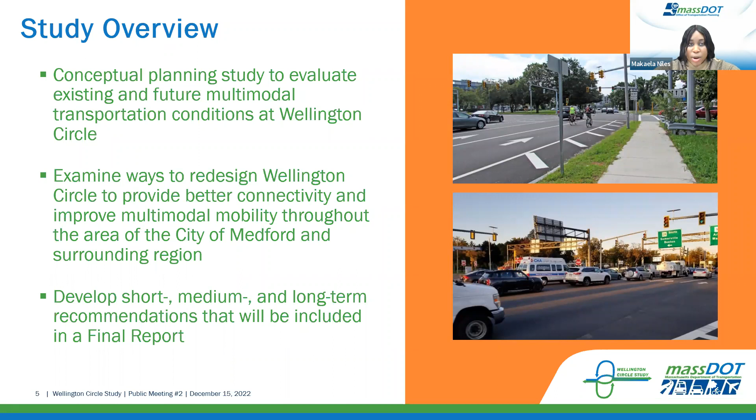And based on the analysis and the feedback received over the course of the study, short, medium, and long-term recommendations will be developed and included in a draft final report that will be released for public comment, then finalized in a final report.

And so with that, I will hand it over to Gary McNaughton of the consultant team to review the issues and opportunities. Gary? Thank you, Makaela. I'm going to run through the issues and opportunities, and also walk through a little bit of an overview of the alternatives and the development process that led us to those alternatives that went through the analysis that we'll spend most of our evening talking about.

With regards to the issues, constraints, and considerations, they're well known. The challenges with the circle: there's a number of deficiencies that make it difficult to travel through the circle and challenging for any mode. Vehicles encounter excessive delays, with multiple lanes turning, creating various conflicts and safety concerns.

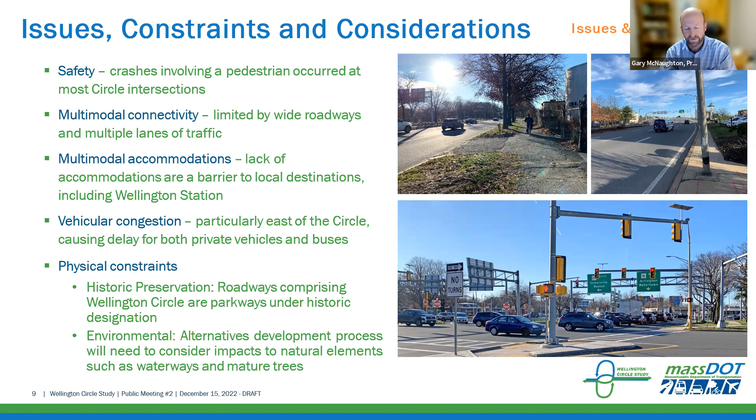As we develop these alternatives, we also have to consider some of the physical constraints. There's historic elements of the corridor, and there's environmental concerns and areas where we want to make sure we're not having negative impacts on those criteria as well.

But the circle does offer us a number of opportunities. There's a very wide right of way in the area that gives us the ability to look at a number of alternatives without impacting abutting private property.

There's changing land uses and abutting open space that gives us opportunities to connect into those properties better, provide opportunities for walking and biking that can better utilize the infrastructure through the circle to take better advantage of those surrounding land uses. All of these together, we think we can make improvements that will reduce congestion, provide healthier, safer transportation options through the circle and for the surrounding area. Those are really some of the goals that you'll hear more about later in the presentation.

The alternatives development process really starts at the very beginning, looking at very basic alternatives and concepts. But it's a lengthy process. We're starting with very simple concepts, focusing on vehicle movements. While that's not one of the primary goals of this study, focusing on vehicles is a starting point because they're the least flexible, the hardest to accommodate and analyze in a number of ways. So we start from that perspective.

We run it through a fatal flaw screening. If something becomes completely unacceptable, we've deleted it at that point and we're no longer advancing it further. But those that did show promise, where we think we can make this one work, we then started to assess them for pedestrians, bicycles, and transit, looking at the ability to add in infrastructure for those modes. In some instances, if we weren't able to accommodate those modes, that became a fatal flaw and those concepts fell out of the mix. Those that did pass and showed promise for all modes were identified as the feasible concepts, and those are the ones subject to detailed analysis against the project goals.

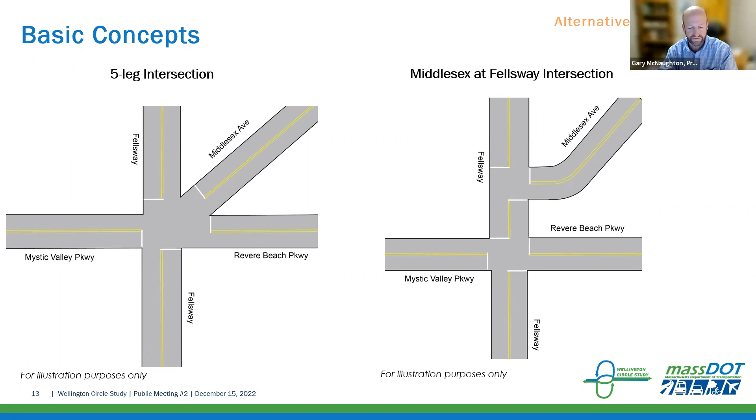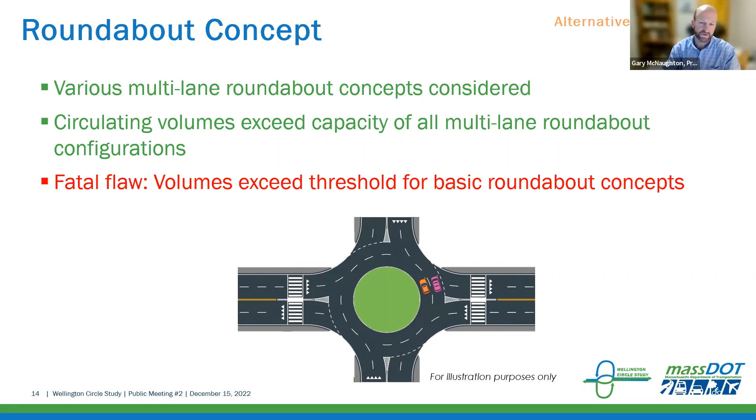From there, we started looking at different intersection configurations and what we could do to make things work for all modes through the circle. We did look at sticking with a circular configuration, looking at roundabouts, whether a singular roundabout or multiple roundabouts, including multi-lane roundabouts. What really happened with any of the circular configurations, because of the travel patterns we see through here, is you end up creating more conflicts than under existing conditions, putting the highest volume moves in conflict with each other. You ended up with a large number of circulating lanes and entering lanes, making it very inhospitable for pedestrians and bicyclists, and honestly not doing a very good job for vehicles either. So we moved away from any of the circular and roundabout concepts.

From there, we started to look at more advanced intersection configurations. Could we look at jug handles, or some different ones you may not be familiar with, like the restricted crossing U-turn, or an RCUT, where you're not allowed to go straight through from the side street. Everybody's turning right, and then you're either going downstream and U-turning or going on to your destination in a different direction.

We looked at continuous flow intersections, where you have intersections on the periphery that allow left turns to cross over through movements, so that when you get to the primary intersection, that traffic can all flow at the same time and you're maximizing capacity. That one showed some promise, but actually had a lot of challenges for pedestrian and bicycle accommodations, and we ultimately moved away from that one as well.

The RCUT had a high volume of U-turning vehicles that made it implausible to implement the RCUT treatment. And the jug handles really just relocated conflicts, but didn't do anything to improve upon or solve any of the traffic flow.

The fourth configuration that we looked at was the quadrant roadway, and that one did show some promise. As you'll hear, the primary traffic flow through here, the heaviest traffic flow, is really from the south to the east, and then the reverse movement. So the quadrant roadway allowed us to provide a more direct connection for those movements that did show some promise, and you'll see that carried forward into the alternatives.

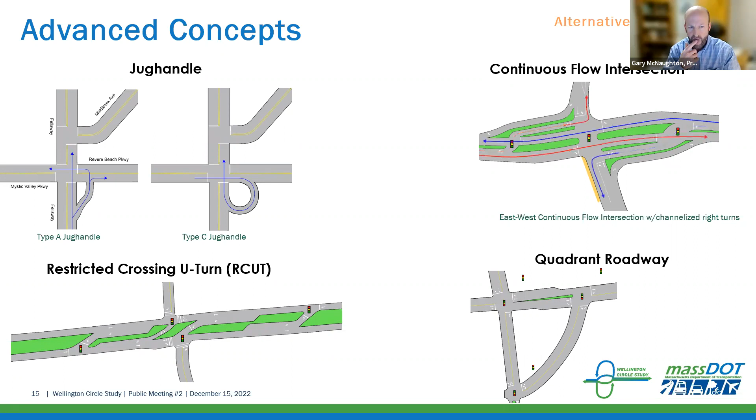So after we got through the initial concepts and started to work out some very basic ideas of what may be feasible for the intersection, we worked with the regional planning agency and their technical division, CTPS, the Central Transportation Planning staff, and they work with the regional travel demand model. So they're giving us the estimates of future traffic volumes, both with and without the project. And they do continue to show growth in traffic volumes, but we didn't necessarily let that drive our design.

A lot of our concept development work was done with existing volumes, and then we were testing things with those future volumes. And we'll talk about some of the traffic volume growth and some of the limitations for accommodating that, and things that may need to be thought of a little bit differently as some of that development occurs and potential traffic volume growth is underway.

We did use a lot of that time and a lot of that analysis to refine the cross sections. We refined the analysis to show access to abutting properties. We tweaked lane designations. We added accommodations for sidewalks and bike lanes, and again, made sure that we were able to accommodate all of the abutting properties and the driveway access that we needed.

You'll also see an alternative that was transit enhanced, looking to improve bus operations through the area that we carried forward. And then you'll see on some of the alternatives, we're missing one of the key crossing locations just due to the nature of the traffic flow and what we're able to make successful in the alternatives. So we looked at the potential for a pedestrian bridge in those crossing locations.

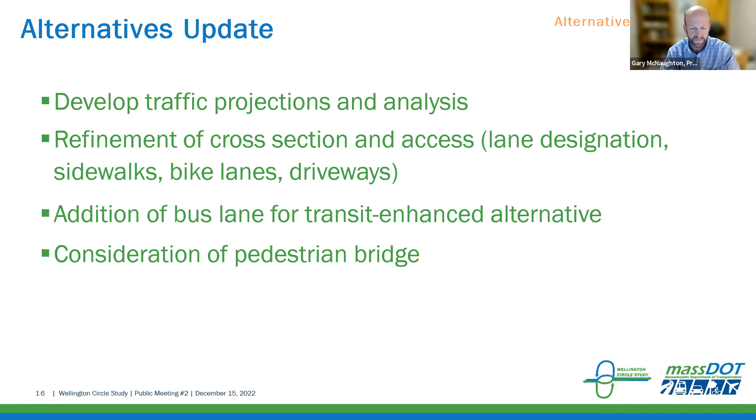So now I'll start presenting the various elements of the alternatives that were advanced into the analysis stage. And then once I'm done walking through the alternatives, we'll start talking about the detailed analysis. All of these are very preliminary designs, so there's a long way to go in design development. These are based on aerial imagery and GIS level mapping.

So any of the alternatives that move forward into more detailed design, there'll be real ground survey, there'll be much more detailed assessment of right-of-way, more vertical design, investigation, utilities, et cetera. So I just wanted to put that caveat out there that there is a long way to go, and these are very conceptual at this point.

So we started looking at some of the short and medium term alternatives. What could we do to improve upon the existing intersection configuration without completely changing everything? And this, what you see on the screen, is what we're referring to as option A, which was a compilation of several a la carte type treatments that we had developed through the process.

We heard feedback that the free right turns, those separated right turns that you see, there's still one in the northbound in this image, but the eastbound has that swooping right turn that's able to be navigated at a fairly high speed for vehicles in front of the state police facility. Similarly, you have one in the southbound direction, and you'll notice those are all removed except that northbound right turn, which is one of the heaviest movements in the corridor and really does need to remain separated.

As I noted, we saw a lot of delays with the right turn movements by removing those separated right turns. So we developed Option B, which simply restores the eastbound and westbound separated right turns. Although in the eastbound direction, we would tighten it up and make it a little less sweeping — something not quite as high speed and better able to accommodate peds and bikes in a lower speed environment. And we would signalize it as well, so pedestrians and bicyclists would have a protected crossing.

So we are seeing some benefits to pedestrians and bicyclists. We're able to shorten some of those crossing distances, and we're getting some of the same benefits in open space. Again, the cost is really essentially the same between these two alternatives when you work them both out. So these show some promise without major construction, but they don't accomplish a lot of the project goals.

The westbound approach coming in is unchanged. Much of the inner part of the circle is unchanged, except for the elimination of that eastbound to northbound left turn. So it offers some benefits, but doesn't get as far as we wanted to.

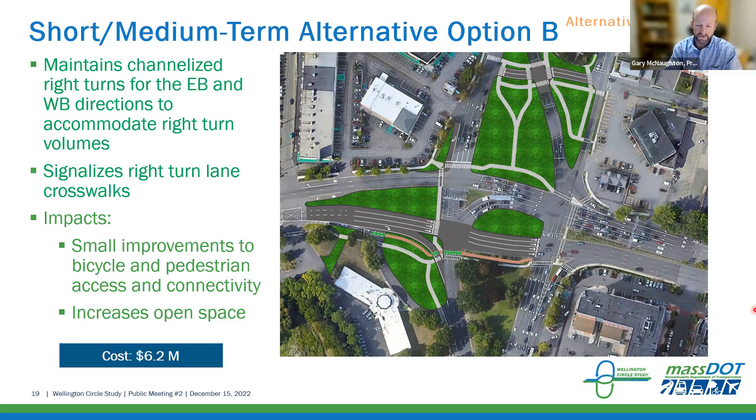So we then moved on to the long-term alternatives. We had a series of both at-grade and grade-separated alternatives that we looked at. But when you start with the existing circle, one thing to note is the number of lanes — keep that in mind as we go through this. You have 6 and 7 lanes on each approach, with 2 and sometimes 3 turning lanes, which we've heard a lot of feedback about, how challenging those are not only for pedestrians and bicyclists but even for vehicles. We were really tasked with trying to improve those conditions, and you'll see a lot of the alternatives use fewer lanes than what exists in the circle today.

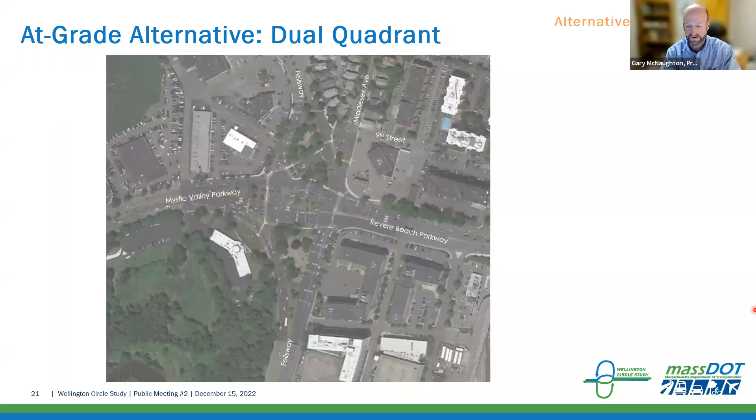So if you go to the next slide, the first at-grade alternative we advanced was the square concept, so named due to the configuration of the open space on the north side of the parkway. You'll notice some key elements of this concept are the quadrant roadway I talked about earlier in the basic concept — from that south section of the Fellsway over to Revere Beach Parkway to the east, we have a new connector roadway, or quadrant roadway. We have elements of that to the north connecting up to Middlesex Avenue as well.

But the primary north-south configuration for this alternative is the Fellsway straight through. If you're on the Fellsway and continuing, it's a straight through movement — there's no need to turn off of that. This does provide a direct connection between Revere Beach Parkway and the Fellsway to the south, which is some of the heaviest traffic flow we see. You'll see a number of locations with fewer lanes than what you see out there today.

And with medians that separate those pedestrian crossings, so you're not crossing seven lanes at a time or more. You're crossing three lanes before you're at least coming to a refuge area along that. We are able to add in pedestrian and bicycle accommodations.

So the light blue aqua color is sidewalks, and the bicycle connections and sidewalk level facilities. The tan areas are the sidewalk or walking paths that we're able to add throughout. You'll notice those throughout the project area.

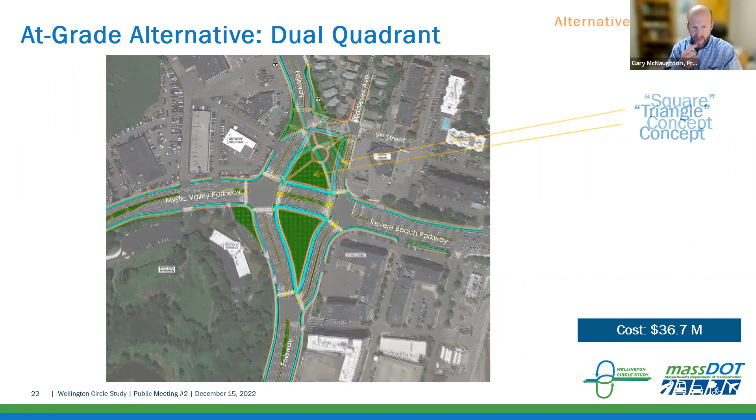That's where we started looking at the grade separated alternative that I'll touch upon. So if you go to the next slide, this is really the other at-grade alternative, called the triangle, again based on the configuration to the north of the parkway itself.

This one really shifts the Fellsway so that its primary connection is onto Revere Beach Parkway. If you're coming down the Fellsway, you're going straight through onto Revere Beach Parkway. If you want to continue southbound on Fellsway, you're going to turn right to then go straight through. This one does a good job of connecting those heavy movements, the heavy flow.

It does a nice job of doing the same things with narrower crossings, medians to provide a break for pedestrians, and additional space for pedestrians and bicyclists throughout the roadway network to fill in some of the gaps we see within the bicycle network and pedestrian connectivity through the area.

The one element common to both, which I didn't mention on the square concept, is the eastbound left turn is eliminated within the intersection itself. Those movements would instead be accommodated at Commercial Street. If you're accessing the retail center, there's still the ability to make that movement, but the left turn at the intersection itself would no longer be there.

So if you go to the next slide, this is the transit enhanced alternative. We're also tasked with trying to make improvements to transit. While the at-grade alternatives would allow transit to exist and move through the intersection areas, we really wanted something we could build upon to make significant improvements for transit.

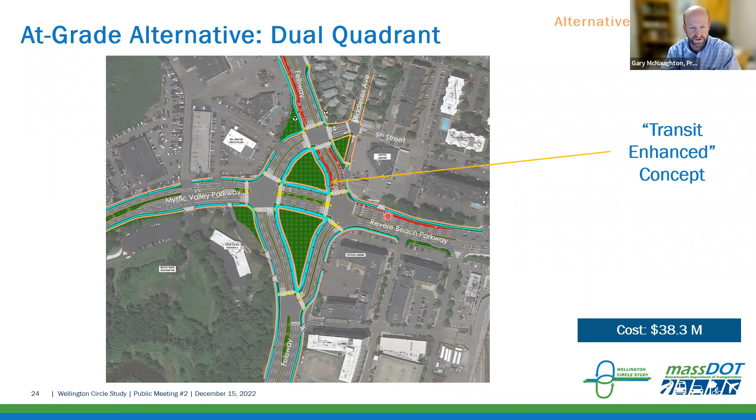And again, missing that crosswalk on the east side of the intersection with Revere Beach Parkway. So if you go to the next slide — there's a lot of desire to try to keep a crossing there. It's not feasible to do it at grade, so can we do it in a grade separated fashion?

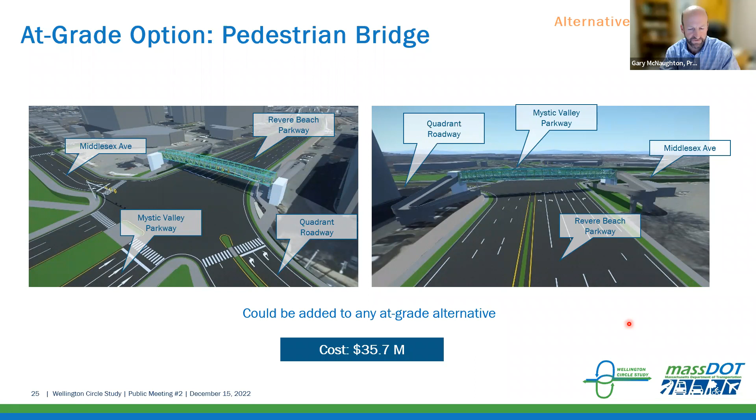The other alternative we looked at was a grade separated intersection that carries the amount of volume that this one does. Grade separation is a natural concept to consider. Some of the uniqueness here is that the primary movement, the heaviest movement from south to east, doesn't necessarily lend itself as well to grade separation. Doing curved structures presents some unique challenges, and as we started to look through it, it really didn't end up solving a lot of the problems.

It leaves a lot of things at grade that presented their own challenges. So as we looked through the different grade separation alternatives, we ended up with grade separating the east-west traffic. It's simpler construction, it accomplishes a lot of the same improvements that we would get from that south and east movement, but gives us a little bit more of a normal roadway network to work with.

We also looked at the underpass. There was a lot of discussion about having a bridge through the area not being desirable, but an underpass might be far less impactful. But as we started looking into the underpass, there's a lot of complications with it. It's much more costly to build an underpass than an overpass. There are a number of utilities through the area, and there's also flooding risk, potential severe flooding during storms, particularly as we look at various climate change projections. Operations and maintenance costs get significantly higher as you have to have pumps and such for drainage considerations with underpasses. So we ended up not carrying the underpass forward into a detailed evaluation.

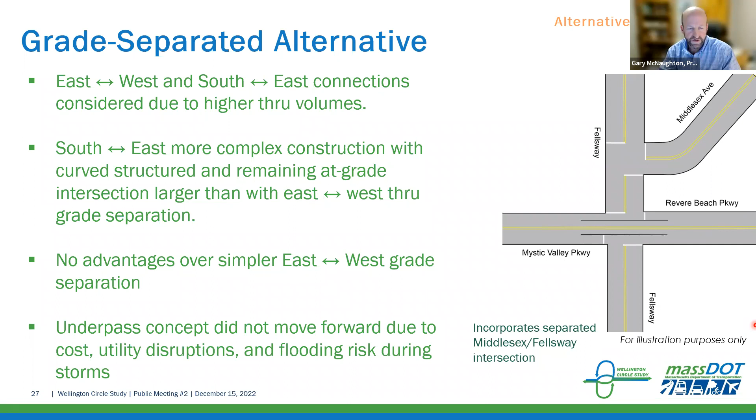So the next slide illustrates the grade separated alternative. You'll notice we still have the quadrant roadway connecting from the south to the east, and Revere Beach Parkway down to Fellsway. You'll notice the bridge structure in the east-west direction going up and over the north-south roadways and those connector roadways. What we end up with on the surface is some narrower roadways, but the roadways are still required to be intertwined around the structure, around some of those supporting piers and walls, so you end up with a little bit of an atypical roadway network on the surface. It's still necessary to make those connections directly between the south and the east.

So you see some curved roadways under there, and again a little bit narrower, fewer lanes on the surface, but a slightly more complicated network and configuration. And you'll see a much higher cost, where the other at-grade alternatives were in the $30 million to $36 million range, this one's 5 to 6 times that cost, quite a bit more expensive.

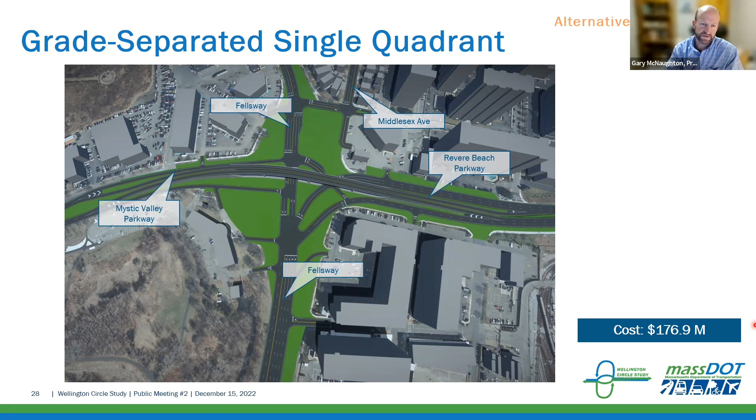The other factor to consider with a grade separated alternative is really the separation and the barrier that it can present. From a visual perspective, this is an illustration from grade level of what that overpass would look like. We've pulled back the retaining wall sections and tried to create as long of a span as possible to keep it as open as possible. But even with those design elements, you still have quite a barrier that would exist and create that underbridge environment that pedestrians and bicyclists would need to travel through.

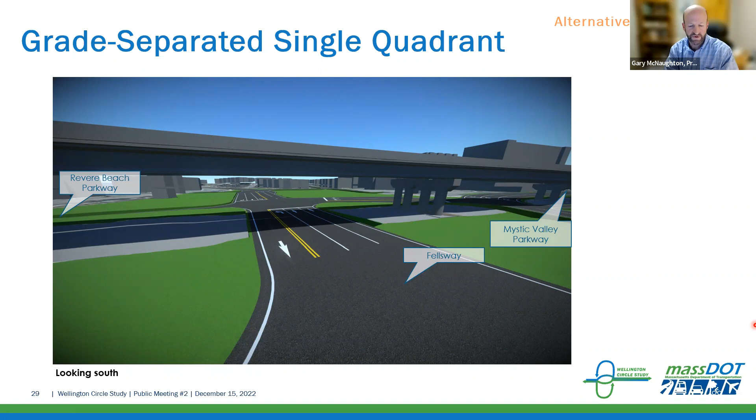So now we'll start talking about the alternatives evaluation, which was applied to those alternatives I just walked through. It's really looking at the study goals, and there were 4 primary goals for the study, informed by a number of evaluation criteria. What we tried to do for this evaluation is keep it fairly simple, not get bogged down into arguments over the nuance of a 1 to 10 scale, is this a 6 or a 7, anything to that level of detail. We just used 3 ratings: does it benefit this criteria, is it neutral, or does it have negative impacts for this particular criteria.

And those are the way that you'll see all of the results presented to you this evening. And with that, I will turn it over to Maureen to start talking about the first criteria that we looked at, which was improving safety.

Thank you, Gary. So throughout the development of the design, safety was definitely forefront in our minds. As we talked about, we reduced some lanes and conflicts, which helps with vehicle crashes. But you can see on this slide a number of elements that would be used to help the other modes of transportation in terms of crashes.

At the onset of the project, we had looked at 3 years of crash data in the Wellington Circle area, and there's a tremendous number of accidents. There were 278 crashes over that 3-year period. Every intersection had pedestrian crashes, which is certainly alarming, and the high frequency of angle and sideswipe crashes between vehicles was also alarming.

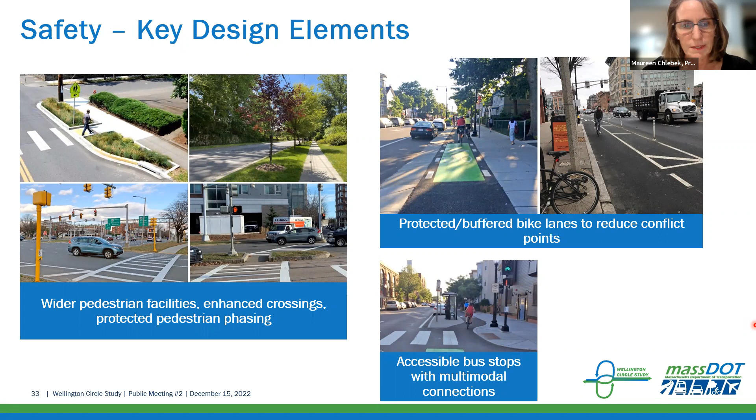So these elements are used in the design. You'll see these features in the design. And again, safety was just our top priority. So on the next slide, we'll summarize how each of the alternatives scored, so to speak, in terms of safety.

So every alternative is expected to reduce crashes in comparison to what's happening out there today. The short-term improvements are expected to marginally improve safety in the area. The build alternatives take it to a higher level with a lot more conflicts removed between each of the modes, the motorists, the pedestrians, the bicyclists. If you look at all the build alternatives, the grade separated alternative results in the fewest conflict points.

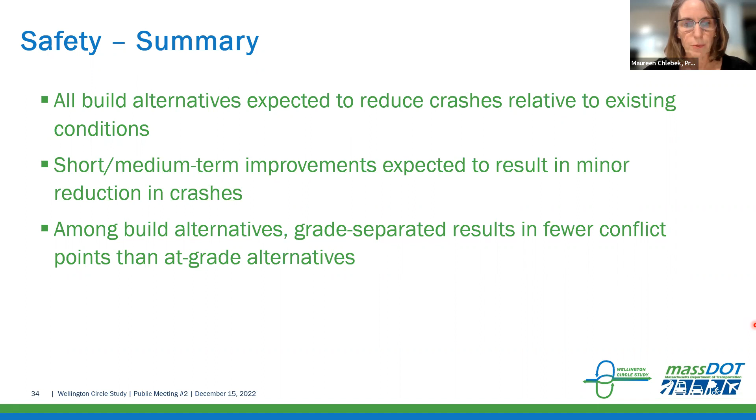Next slide. Now I'd like to walk you through some of the traffic analysis that was done. And again, we're going to talk about each mode of traffic that's out there. So we're kind of spelling our results right out at the beginning. And as you can see here, we evaluated how each mode of transportation works for each of the 4 alternatives.

The short-term, the long-term at grade. The first one would be the square. The second one would be the triangle with transit enhancement. And then the third long-term is the grade separated.

And as Gary had explained, we either said it was better, neutral, or it got worse. What we'd love to see is one row with all green checks, but that doesn't happen in Wellington. And what this says to us is really it's a balancing act. We can improve some aspects, but it's going to hurt other modes.

So throughout, you can see the short-term improvements offer a little bit of improvement to the pedestrians. As we get into the long-term improvements, again, the walking and biking improves with the at-grade alternatives. However, it's at the expense of some of the driver operations. And then as we get into the long-term grade-separated alternative, we perhaps improve vehicle operations, but we don't help the transit and walking. So keep this in mind as we go through the analysis.

I'm going to speak to the vehicle operations, and then Emil will speak to the walking and pedestrian operations.

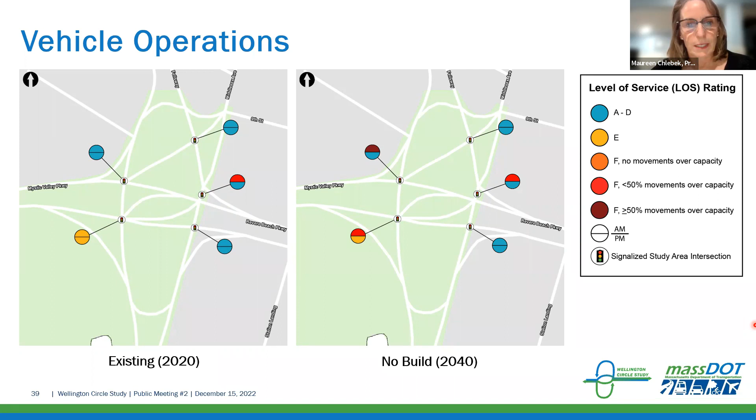Because it's a large infrastructure project, we typically project out 20 years. As Gary said, we have accounted for some growth out there. We haven't designed for the growth, but the evaluations on all the build alternatives will be based on the 2040 conditions. So what you can see here is if we compare what's out there today, if we do nothing to the roadway system, you can see what we would expect to happen by 2040. Some of the levels get worse as we move out 20 years from now.

On the next slide, we're going to do a comparison between the 2040 no build and the at-grade square alternative. As you look at this, I would ask you to look at the street network and how much simpler it is. Our focus has really become trying to manage the queues at those major intersections, keeping the safety features in there, trying to get traffic through and processed as best we can, without worrying so much about levels of service.

As we go on to the next slide, you'll see the same type of comparison, this time with the at-grade triangle with transit enhancements. Very similar results to the at-grade square.

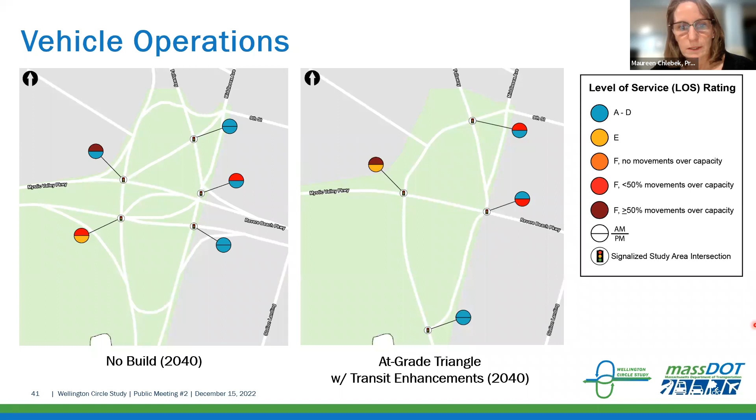And then lastly, we'll do a comparison of the future no build to the grade separated alternative. This is the one time we do see some improvements to vehicle operations. We see some of those intersections moving up to a level of service E. However, as we've mentioned before, this improves traffic operations for vehicles, but not for the other modes of traffic out at Wellington.

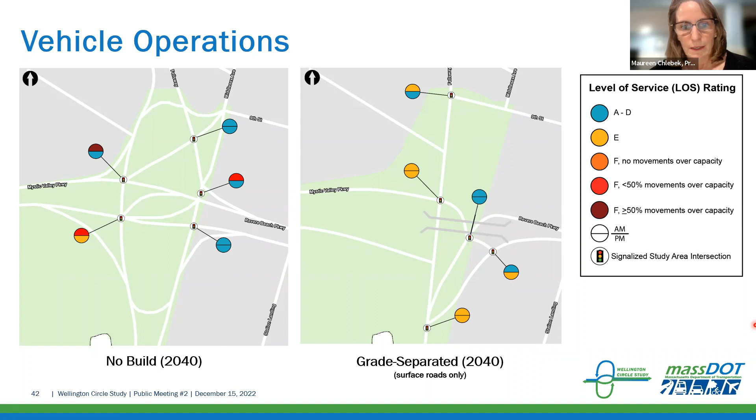So with that, I'm going to turn it over to Emil, who will concentrate on the non-motorized users on the roadway. Thanks, Maureen. I'm going to speak through the pedestrian, bicycle, and transit impacts of the different alternatives.

Starting off, we are looking at pedestrian connectivity. What we have graphically highlighted here are the crossings that we think are improved under each alternative. These might be shortened crossings, crossings that are currently unsignalized that would become signalized, or areas where it's currently not possible to cross Wellington Circle, which would become possible under these alternatives.

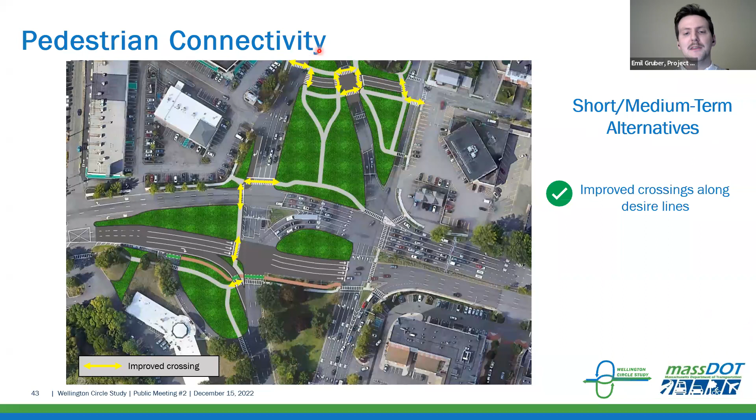So we can see with the short-term alternatives, this is option B shown here. You can see we have improved crossings mostly at the north and a little bit on the west side of the circle. Moving on to the next slide, we'll go through the long-term alternatives.

Starting with the square, you can see most of the crossings are improved to some extent, many up at the north through the circle, and we do open up some new crossings to the south. The one thing, as Gary mentioned, which we're going to highlight, is that the crossing on the far east side is not provided under any of the long-term at-grade alternatives, and that's an area where we could potentially incorporate that pedestrian bridge.

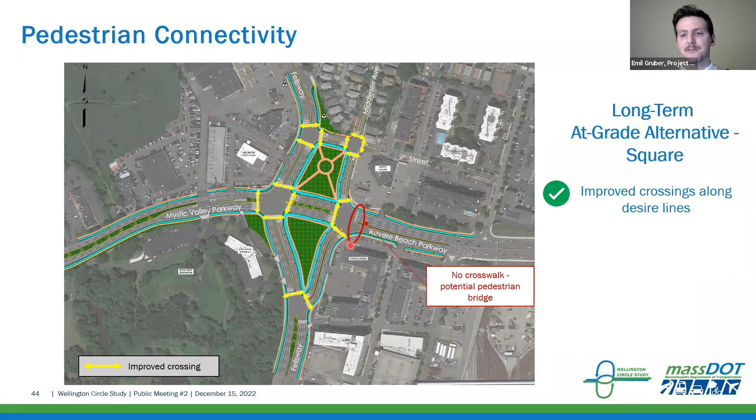Moving on to the triangle on the next slide, you'll see very similar results, improved crossings all around, but no crossing on the east side.

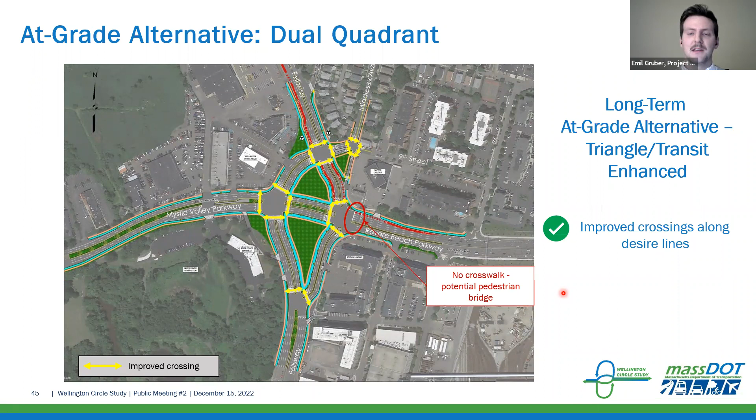And then if we go on to grade separated, this one is sort of the most difficult to compare to the other alternatives because it so fundamentally changes the nature of the circle. But what we see here is many crossings, which can be both a positive and a negative. The crossings do tend to be shorter than under the long-term alternatives. You're often crossing only 2 to 3 lanes at a time.

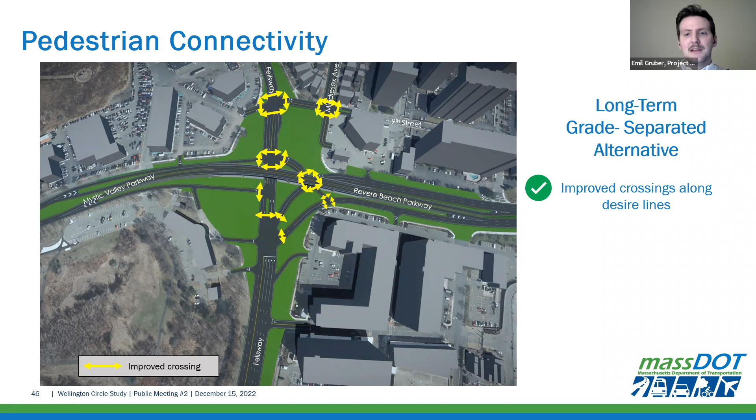However, there is also that element of some of these crossings occurring underneath that highway-style overpass. So continuing with pedestrian connectivity, on the next slide we tried to quantify that. When looking at existing conditions, we identified this northwest corner to southeast corner crossing to use as our bellwether to assess all these alternatives within these presentations.

Looking for that northwest to southeast corner crossing, under existing conditions it requires about 6 different crossings across vehicle lanes. The short or medium term alternatives, specifically option A, would reduce that a little bit, getting rid of one of those channelized crossings. Our long-term at-grade alternatives cut the number of crossings required for this route basically in half, with the grade-separated option being a little higher, back up to 4 crossings required.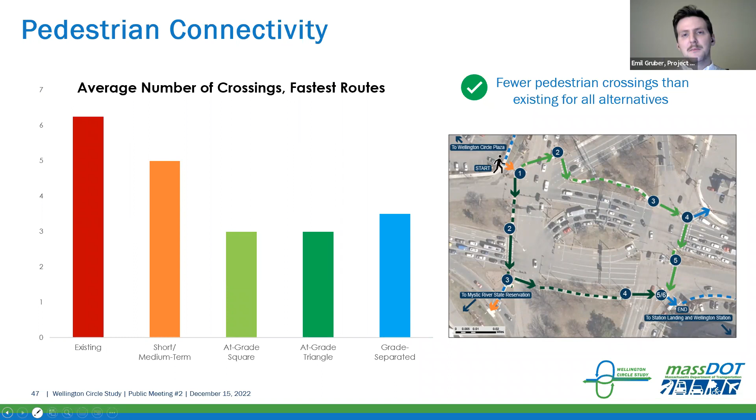Moving to the next slide, we'll talk about pedestrian delay or travel times, again for that same route discussed previously. This is how long it takes to get from point A to point B. Under existing conditions, it takes nearly 5 minutes on average, and about half of that time is spent waiting to cross the street.

With the short-term improvements in place, we save about a minute of travel time, most of which is time spent waiting, similar to the long-term grade-separated alternative, which also provides about a minute of savings. The long-term grade-separated option actually provides a bit more travel time savings since you're able to cross more directly through the middle of the circle.

But then we see a real point of differentiation for our long-term at-grade alternatives — this would apply to basically any of them for this route, as they're effectively the same. Those would be estimated to save about a minute and a half out of that 5-minute total crossing time, most of which would be time saved from waiting.

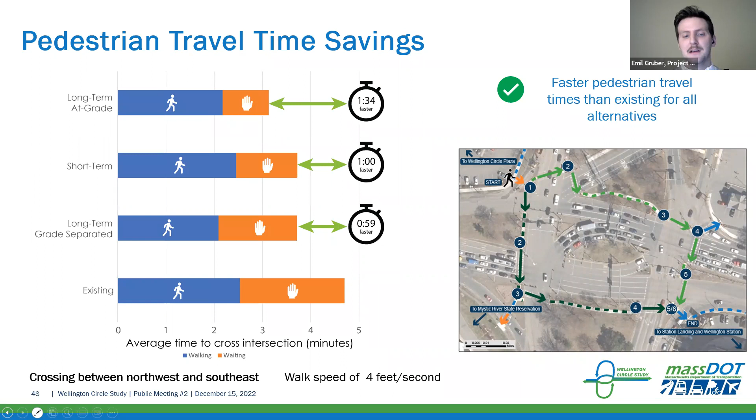The final aspect we'll talk about for pedestrians is the overall pedestrian experience — how difficult or easy is it to walk through the circle? One way we quantify that is by looking at the number of pedestrian crossings of more than 3 lanes which do not provide a pedestrian refuge island, throughout the entire circle for all these alternatives. Under existing conditions, there are 8 of those types of crossings.

For each of the alternatives, there are different amounts. The long-term at-grade square provides very few — about half as many as existing. One potential downside of the transit-enhanced triangle is that it provides a bit more of these crossings, in part because of the added bus lanes. Again, the long-term grade-separated option tends to provide shorter crossings in general.

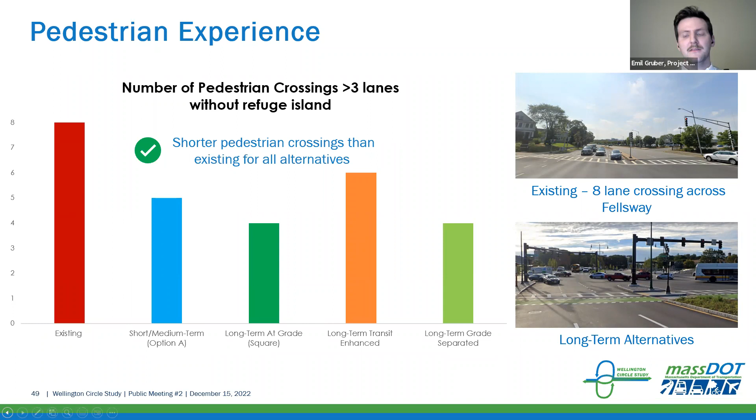A final element on pedestrian experience, since it's a major differentiator, is the overall pedestrian experience. Wellington Circle today has very wide lanes and tall, large highway-style wayfinding signage. In general, it feels very much like a highway and not an urban intersection.

One thing we think we can do with all of our alternatives, particularly the long-term at-grade alternatives, is bring things back to more of a human scale. Obviously it will still be a quite large roadway and intersection, but less of that highway feel — with the exception of the grade-separated alternative. Fundamentally, it's hard to correct that highway-style feel when there's an overpass over the roadway.

So that is our assessment of pedestrians, and moving on to bicycles next.

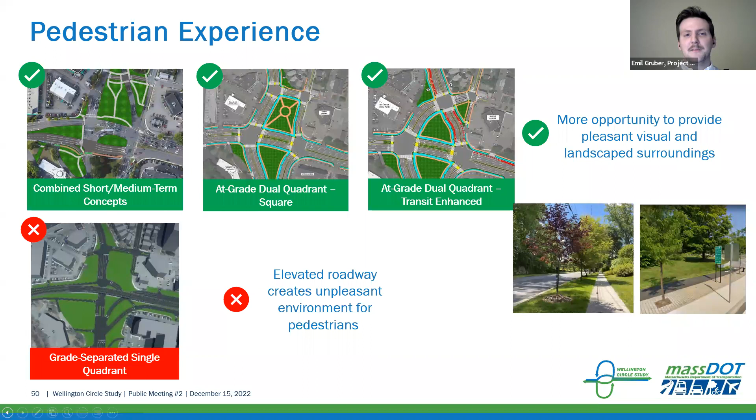So when we were talking about the bicycles, looking at the existing conditions at Wellington Circle, we looked at the surrounding bike networks where there is currently bike infrastructure provided. If you see that gap circled in yellow, you can see there's a big hole in the middle of the network, and that is Wellington Circle.

Looking at the short-term alternative for bike connectivity, we do provide that opportunity for the eastbound separated bicycle facility, so that specific movement through the circle is somewhat improved with the short-term alternatives.

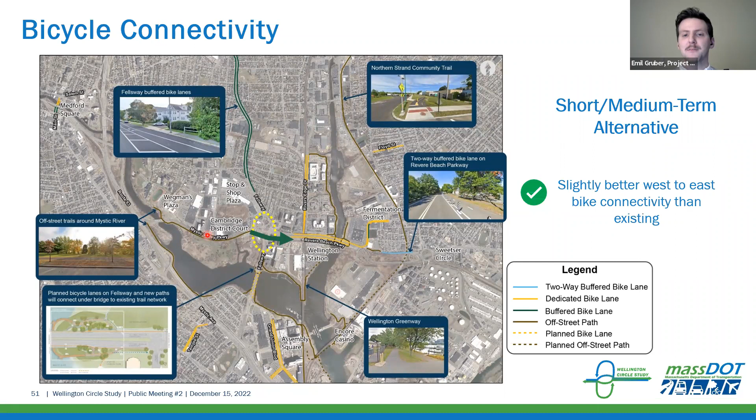But then going on to the next slide, for really all of the long-term alternatives, grade separated or at grade, we think we can provide high quality separated bicycle facilities more or less throughout the entire circle, and really fill in that gap and connect to the surrounding bicycle infrastructure.

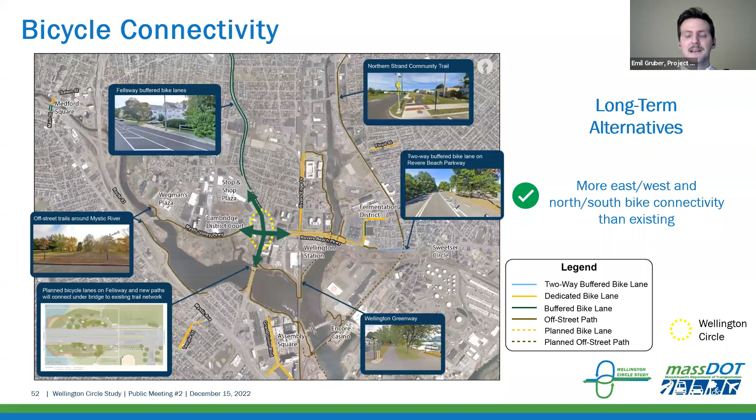I think of the benefits of the different alternatives we're looking at, this is certainly one of the major ones: the potential to provide high quality bicycle facilities. As we go on to the next slide, we tried to quantify that into a chart showing the number of total approaches into the circle that we'd expect to provide high quality, high comfort bicycle facilities.

You can see under existing conditions, none of the approaches really do—there's essentially no bicycle specific infrastructure out there. Short and medium term lets us add essentially one approach's worth of bicycle facilities. And then the long-term options, drastically more.

The at-grade options, we expect we'd be able to provide good bicycle facilities essentially on all approaches and throughout the circle. The grade separated option is slightly worse, potentially because on the east side of the intersection, where you have that bridge and a number of surface roadways as well, there may or may not be the space for the bicycle facilities, or at least for separated, signal-separated bicycle facilities.

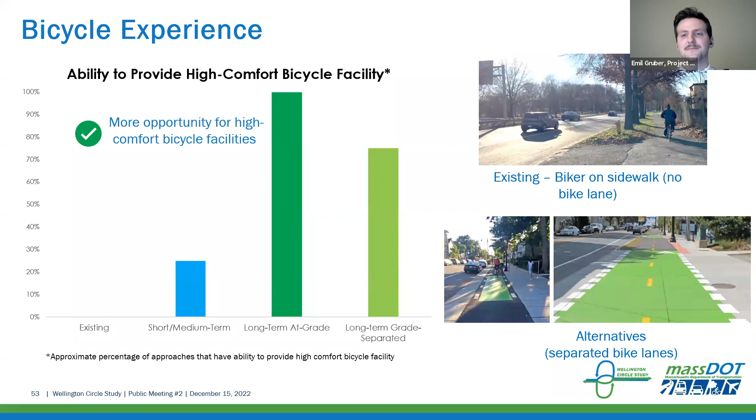And then moving on, finally, we're going to talk through the transit impacts. So transit in Wellington Circle has two elements to it: there is getting to Wellington Station, which we'd expect the pedestrian and bicycle improvements would help make easier, and there's that impact.

But what we're looking at here specifically is for those bus routes through the circle that Gary was talking about. These routes all come from the north on Fellsway and head over to Wellington Station. As Maureen was saying, the long-term at-grade alternatives do show a reduction in vehicle capacity relative to the existing circle, and buses are using those surface roadways, so they are impacted by that.

This chart shows the travel time savings, so those negative numbers suggest increases in travel time. You can see the long-term at-grade and the long-term grade separated alternatives are shown to increase travel times by about 20 to 30 seconds. The long-term at-grade shown here is the square, by the way.

And then that long-term at-grade triangle with the transit enhancements, we see not only does it reverse the travel time increase we'd expect under the long-term at-grade alternatives, it actually shows a pretty substantial decrease in travel time relative to existing conditions for the buses going through the circle. We'd probably expect that the triangle would be somewhere between the long-term at-grade shown on the left and that improved, transit-enhanced triangle.

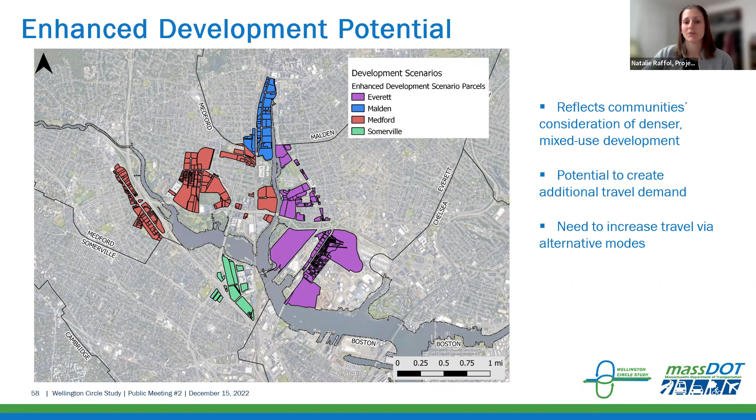Through this zoning scenario, they would be denser and bring more people to this area, whether employees, visitors, or residents. The parcels expected to have denser development are shown in the colors here on this map. The main takeaway is that with more people in this area, and knowing there's a limited opportunity to increase vehicular traffic capacity, there is a need to increase travel by alternative modes in the future in this area.

Looking at public health, overall there are expected to be benefits across alternatives for each of the three categories evaluated. The benefits to air quality can be attributed to reduced emissions, expected as a result of EPA and federal policies for vehicle fuel efficiency.

There's an NA under the short medium term because that alternative was not included in the modeling, so it doesn't have the same result as the others. Also, given its short-term nature, there wouldn't be as much progress on meeting those future fuel efficiency standards.

Looking at active transportation facilities and connectivity, as Emil just explained, there are opportunities throughout all of the alternatives, though the short medium term is smaller for bicycle connectivity, but still benefits compared to the existing condition. All of these would be expected to improve opportunity to use both active modes more comfortably and frequently within the Wellington Circle area.

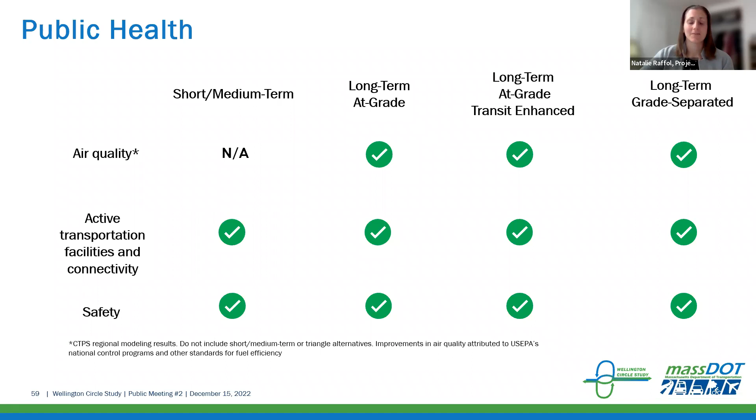Lastly, looking at safety, we expect it to be improved for all alternatives, as Maureen also discussed, by improving clarity in the circle and reducing conflict points for each mode.

Another element we looked at to evaluate quality of life we're calling community cohesion. The short, medium, and long-term at-grade alternatives we see as reducing barriers between neighborhoods because of that enhanced multimodal connectivity provided from all neighborhoods surrounding the circle to another neighborhood.

However, the grade separated alternative, while it has some improved connections for the at-grade roadways, the grade separated portion of that alternative would create a visual barrier between neighborhoods. We've learned from other areas nearby, such as McGrath Highway in Somerville, that an overpass serves as a barrier, even if someone can technically walk under it or use transit under it. It still is a barrier for the community.

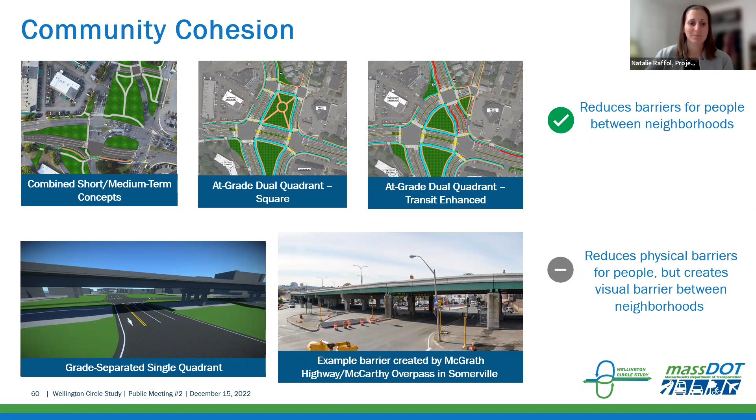Lastly, we look at the impact to environmental justice populations. Here we have a map showing where the populations are located. As you can see, all around Wellington Circle, the light orange shows those that meet the minority threshold, and the darker orange shows the minority and low income thresholds. The percentages on the map show the percentages of car-free households surrounding the circle.

Overall, our analysis shows there's no disproportionate negative impacts to environmental justice populations compared to the population at large. We can even say that the alternatives are expected to benefit car-free, minority, and low-income households by improving multimodal connections to Wellington Circle.

So with that, I'm going to turn it back to Gary to summarize our results.

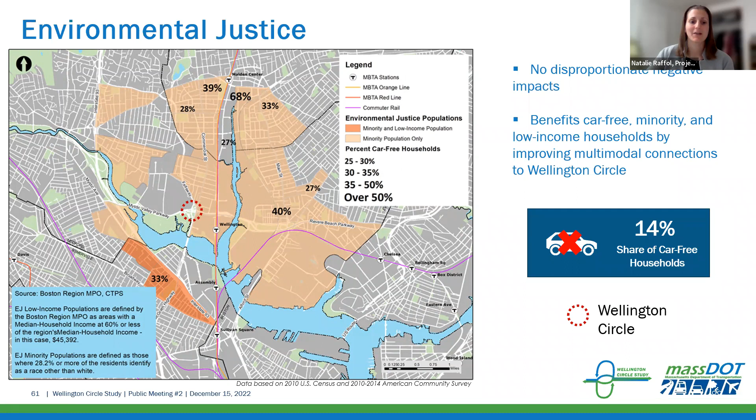From the vehicle operations perspective, the short, medium term, and the at-grade alternatives are not designed or intended to improve vehicle operations and increase capacity, but they do very well in many of the other metrics for pedestrian and bicyclists, for safety, and for a number of public health, economic development, and cohesion metrics. When you look at the grade separated alternative, it does do well for vehicle operations, but it has either no real positive benefit to a number of modes like pedestrians and transit, and has the potential for some negative impacts in other areas such as public health.

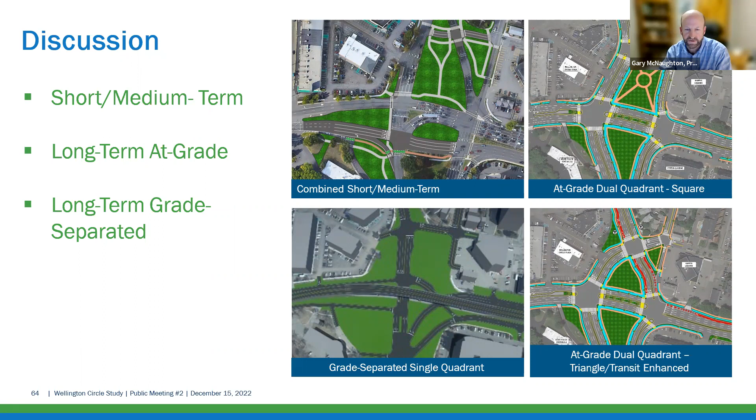Thank you. I'm not seeing any additional raised hands or comments or questions in the Q&A at this time, so I think we'll give it a moment before we transition to next steps for this process.